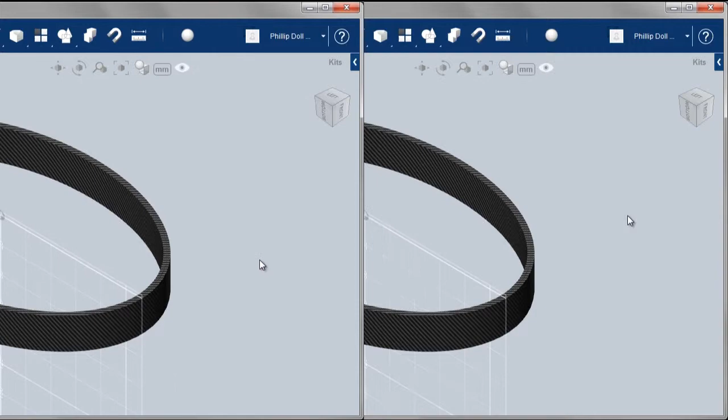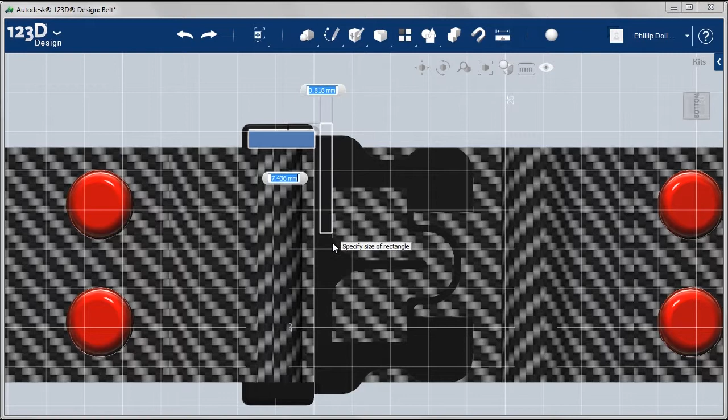Let's get started in creating that second half of the clip. To do that, I'm going to use that as a template, starting with a sketch rectangle. Select my sketch plane, and these are approximate dimensions. We'll refine them after we build our prototype. Drag that rectangle out. You don't want to go too far to the right. You want to stay in that area right there. That's good.

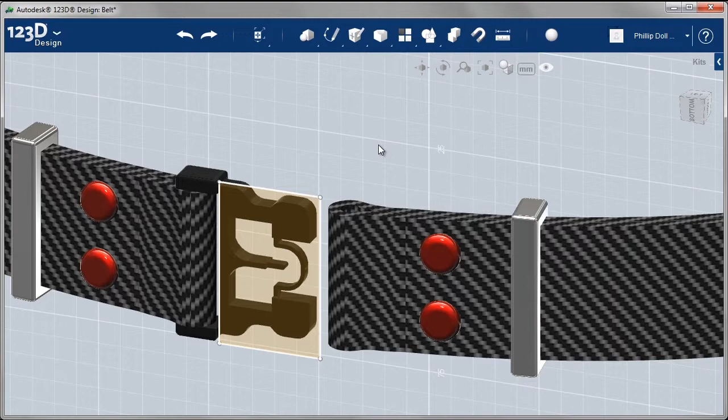Now I want to extrude that profile, but if I don't hide the belt, I'm going to take out the existing half. So what we need to do is we need to hide the belt. Select the belt, select hide. Now we can go ahead and extrude that profile. Select extrude. I want to go into the screen, -7 millimeters. Now you'll notice I'm using millimeters for my dimensions. If you want to use inches, you can do that by going to the drop-down menu.

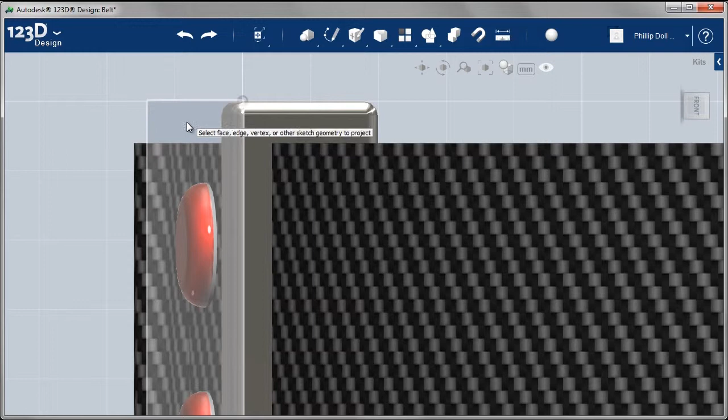In the next section of the design, I want to add some small rectangular pieces on, and from those rectangular pieces will be the pin that will complete the design of this half of the clip. So to do that, I'm going to turn around and look at the face that I created on the first part and project that surface. Then go to Sketch Rectangle again. That gives me that corner. So select my sketch plane, select the corner, and drag it out. You want the lower edge of the rectangle to be just above the existing belt.

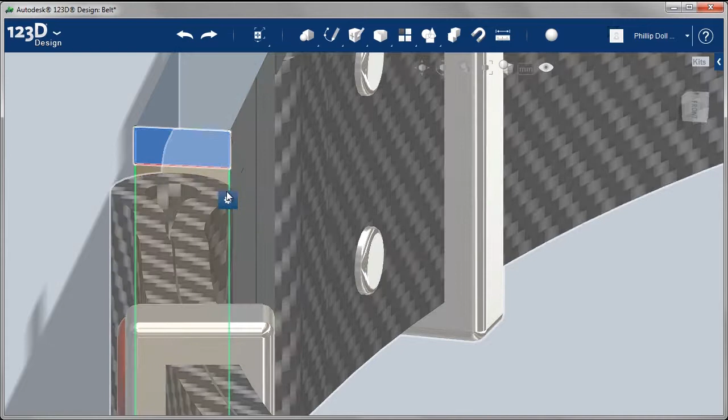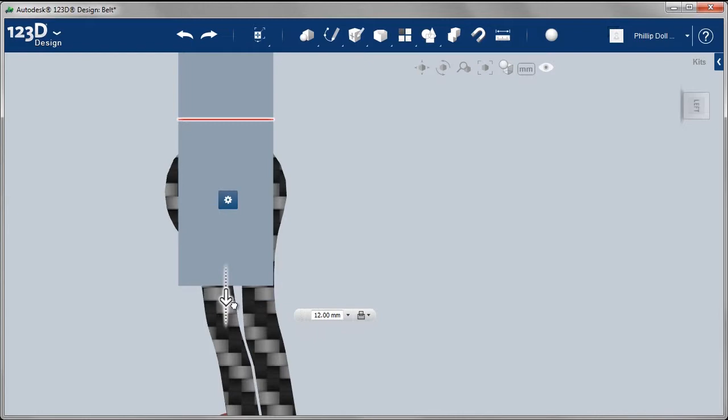We have that profile. I can now go to Extrude. I don't quite know the distance, so I'm going to drag on that, and I'm going to look at it from a couple of different angles. Let's look at it straight top down. That's probably a little too large. Let's drag that back, and I'm looking at the values. It's currently around 14, 13. Let's try 12 and see what happens. 12 or 13 looks good. Let's settle on 12. Now to complete this design, we need to build a similar little part on the lower part of the belt.

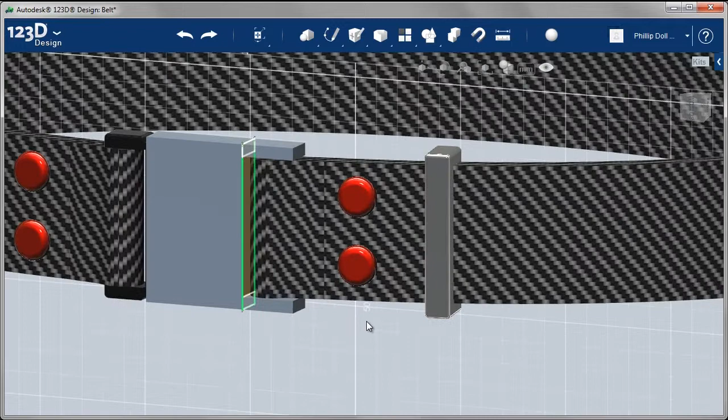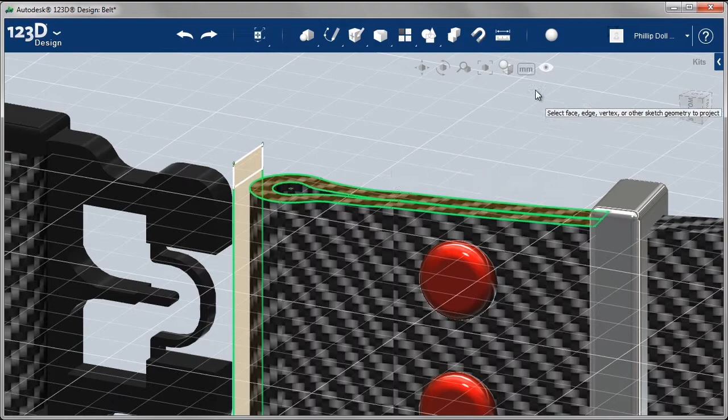So I've gone ahead and completed that second part. You can see it down towards the bottom. And what I need to do now is create the pin that this half of the clip will rotate upon. Okay, I'm going to start by hiding the part that I just built. The reason why I'm doing that is I'm going to project the existing surface. So select the top of the belt, show the solids again, and that gives me a pretty good idea as to where this pin should be located.

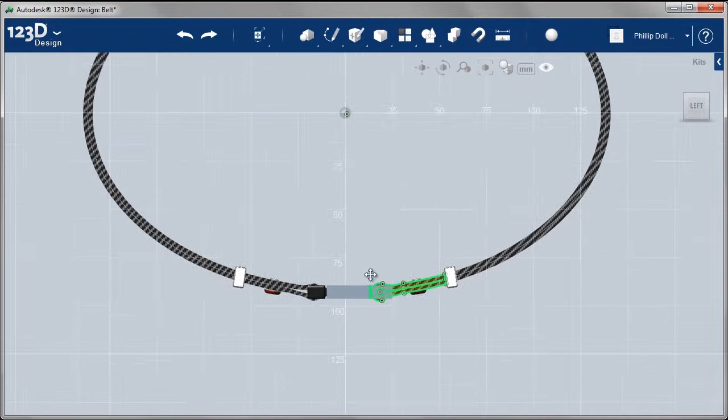I'm now going to go to Sketch, Circle. I could select that top surface and just drive the pin right through it, but I'm actually going to select the underside surface, which takes a little bit of use of the Orbit tool and zooming and panning. Let's get back to where we were and draw that circle. Keep in mind the function 6 key will always take you back to the full view. I've selected the circle, and I'm just dragging that out to an approximate size and placing the circle.

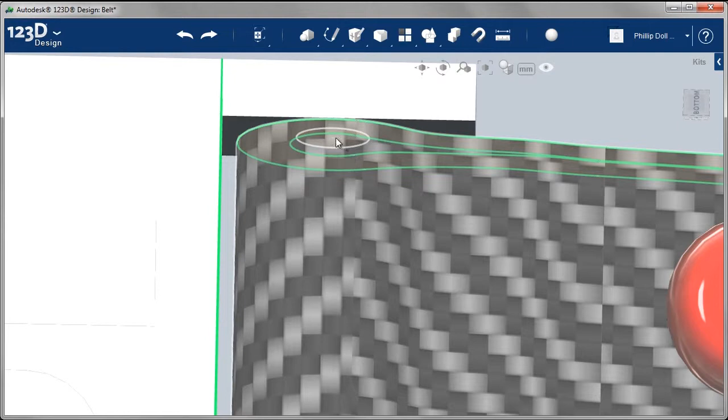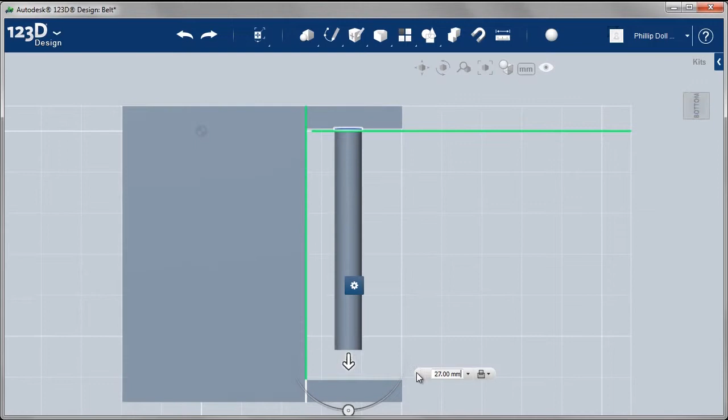With the circle created, I can now extrude that profile, which will give me that pin. I think it'll be a little bit easier if I hide the belt. So select Hide from the menu, select the profile, then select Extrude. I don't know the exact distance, so what I'm going to do is simply drag that down. You can actually go into the other part just a little bit if you wish. So it has to be equal or longer. Looks like 27 millimeters is the answer. Make sure it's join.

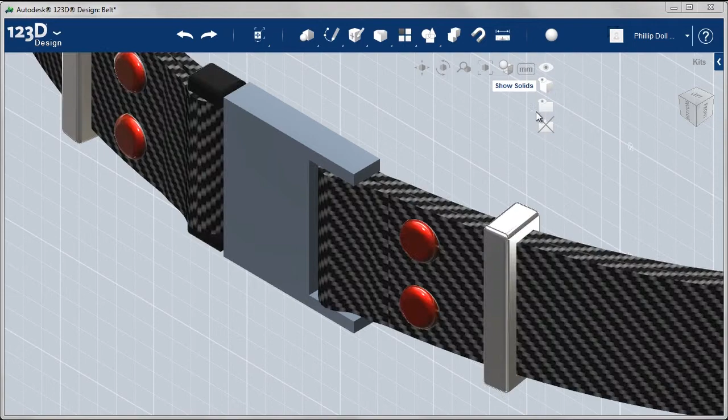So that's good. We've created the second half of the belt now. We've created that pin. I'm going to hide all the sketches and show the solids again. So in the next stage, we'll be cutting out some holes so that the clip can actually clip onto the other half.